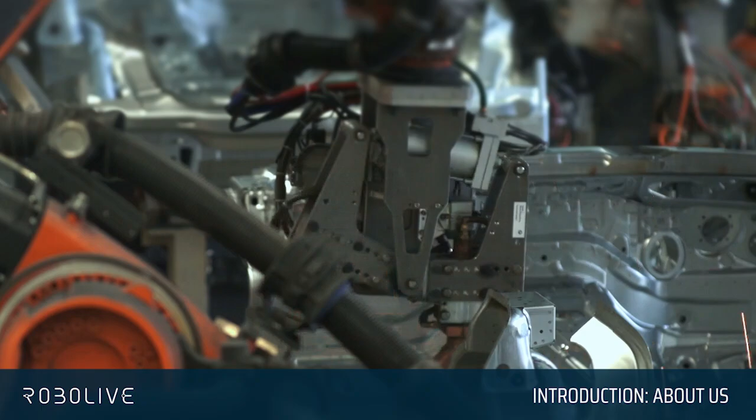Over the years, RoboLive has grown into a full-featured custom solution driving production at plants around the world. RoboLive Visual is deployed and running right now in a variety of industries, from battery manufacturing to OEM parts and beyond. The software solutions, services and features are used across the body shop by teams like quality assurance, maintenance and plant management. By watching this demonstration, you will be able to understand how RoboLive Visual operates and what benefits it brings.

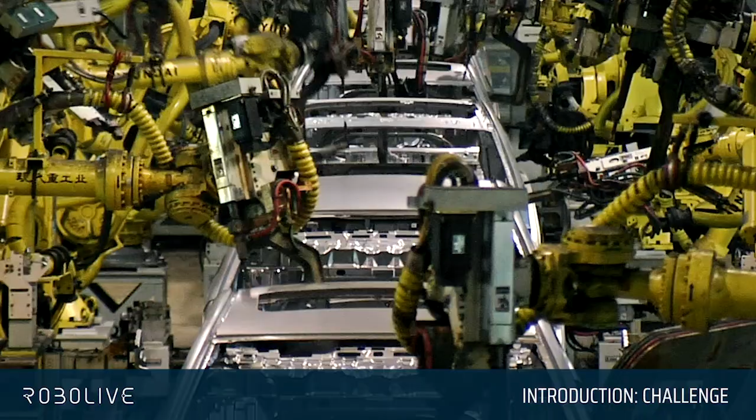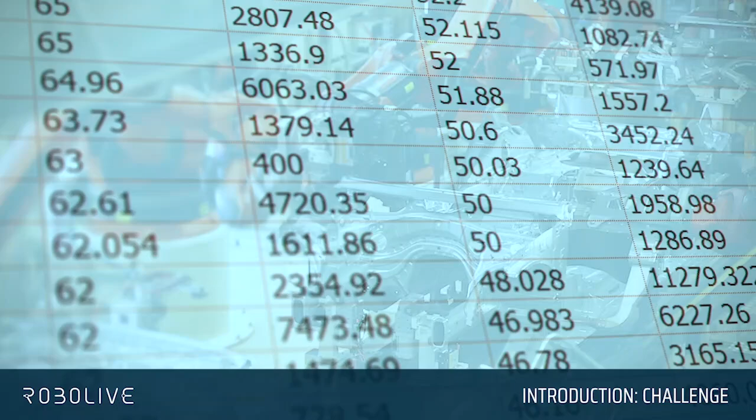Automation transformed how factories operate, and the current wave of digitalization is changing it once again. Modern plants rely on robots for a variety of manufacturing tasks. Some manufacturers have as many as thousands of robots working together in complex and delicate operations like welding and gluing. These processes both produce and utilize a lot of data: programming instructions, positions, parameters, and so on. Ensuring quality and efficiency in production relies on staff being able to access and interpret this data easily.

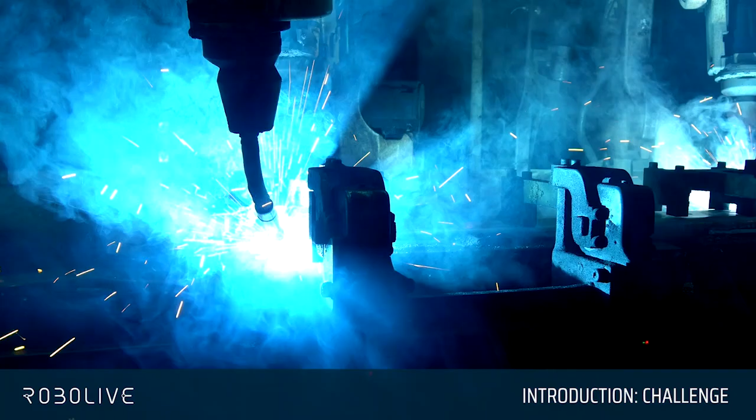This is where the problems begin. Dealing with high volumes of complex data is a big challenge, and most manufacturers don't have a way to keep data accurate and available. For example, contractors might come in on a weekend and make changes that go undocumented. You might need to look more closely into a parameter that isn't accessible without stopping production. In factories that have dozens of lines, hundreds of robots and thousands of processes, keeping track of all that information is an almost impossible task.

These issues have real consequences. Not understanding exactly how your robots are programmed can lead to production issues like missing welds, which can be costly and dangerous. And maintenance action is complicated and time-consuming when documentation is missing or out of date.

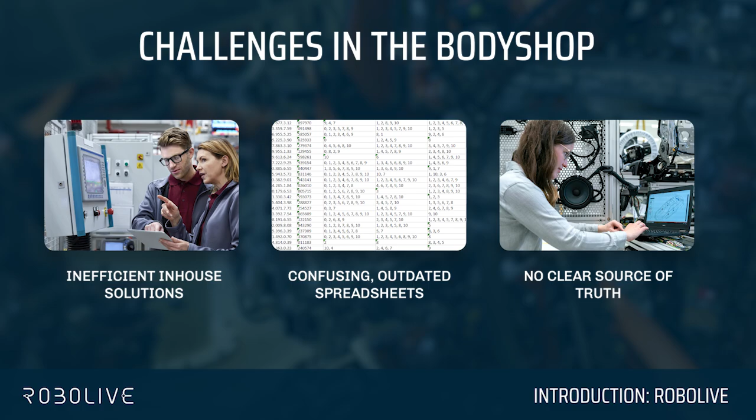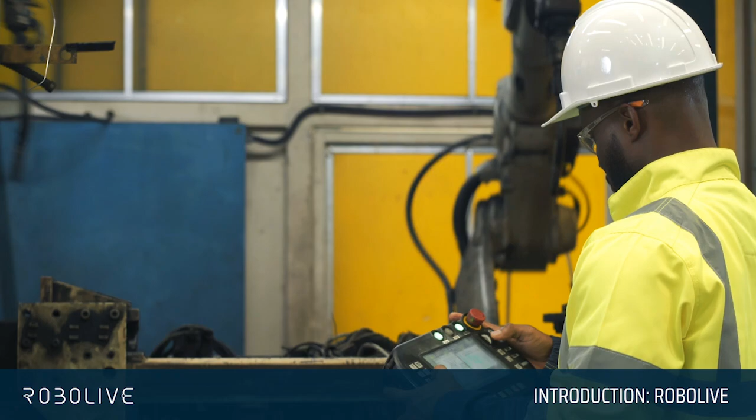Most manufacturers have come up with workarounds to the challenges posed by data management in automation, and you may be familiar with some. Our team has seen it all: complicated Excel sheets, manually updated printouts, even email chains attempting to keep everyone on the same page. These solutions all have something in common: they are time-consuming, labor-intensive, and often produce inaccurate results. None of the current solutions available are taking advantage of current advancements in manufacturing technology.

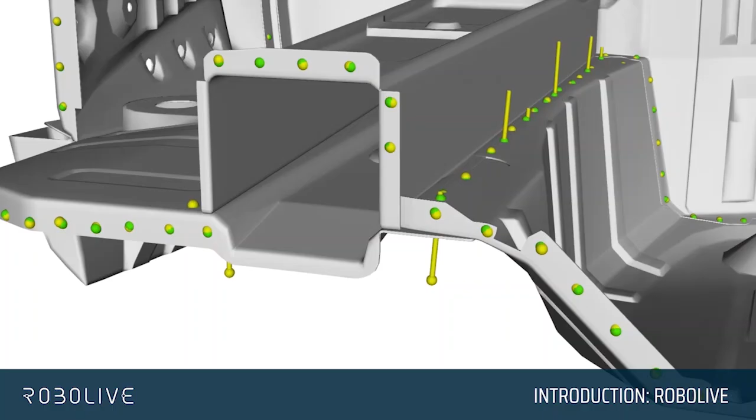That's why we made RoboLive. RoboLive Visual is a software solution that automatically collects, analyzes, and formats your robotic joining data for easy understanding. It comes in the form of an installable client, which can be used on any Windows PC and receives updates from your production robots either automatically from a local server or via regular serviced updates. Using the RoboLive Visual Client, you can view all of your process information in easy-to-use visualizations and data tables.

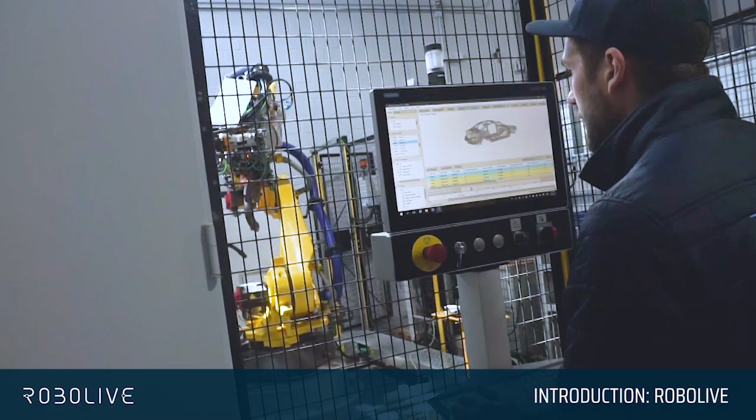Process visualization in RoboLive Visual is an intuitive and comprehensive way to view your nominal and actual process points on a CAD model of each product, while the parameter table's ability to sort and filter process data can greatly facilitate quality checks and root cause analysis. As we go through the software demonstration, you're welcome to follow along in the demo version of the RoboLive Visual Client. Reach out to a team member today for a free download.

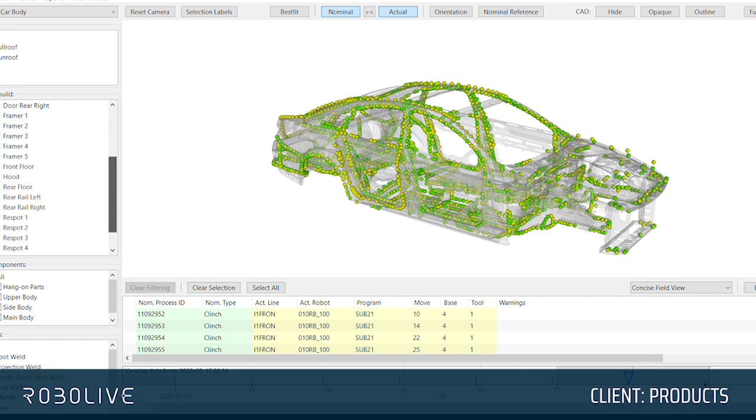RoboLive Visual is able to keep track of data for any of your product's variants and parts. When first starting the RoboLive Visual Client, all integrated products will be selectable from a drop-down menu in the top left corner. Variants are displayed below and can be toggled on or off. Each associated line and part will appear in the menus, where you can refine your display even further. There's no limit to the amount of products and variants that RoboLive Visual can process, and switching between them is as simple as a single click.

To get started viewing and interacting with data in RoboLive Visual, simply select a product from the drop-down menu. The product model will be displayed in the visualization window with its processes visible, and full information about each process point will be available in the parameter table below.

By default, RoboLive Visual's process visualization combines 3 sets of product data: the CAD model, nominal or planned process data, and the actual data. These pieces of information combine to form a complete picture of your products.

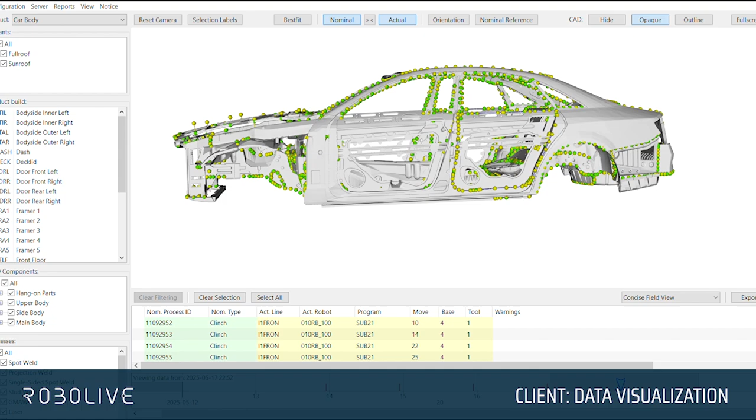CAD data is integrated during the initial setup of RoboLive Visual and shows as a 3D model of each part or product. There are a few viewing modes and features to make the models easy to interact with. You can change the colors of each part, toggle visibility, or change the display mode entirely. By selecting options in the side pane, you can view one or multiple parts together.

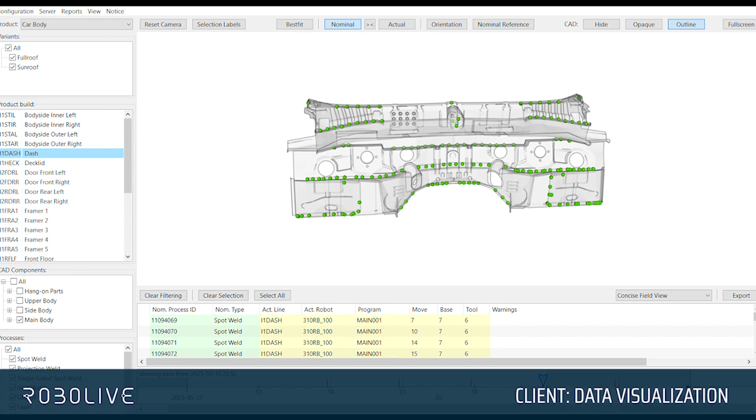The most valuable part of RoboLive Visual's process visualization is the ability to visualize each process point in 3D space directly on the part, both nominal and actual.

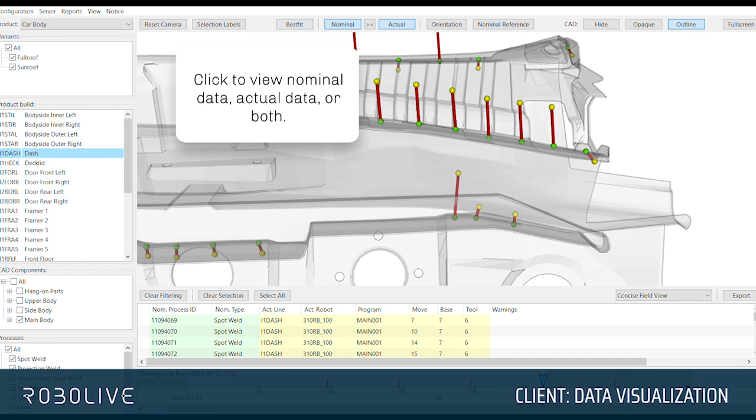During RoboLive Visual's initial setup, planned production data is integrated into the program and represented as green dots on the part. The actual data, the information about where processes are actually taking place and with what parameters, is receivable from the robots at regular intervals during production. It's represented with yellow dots, and any deviation between the two is automatically drawn in with a red line.

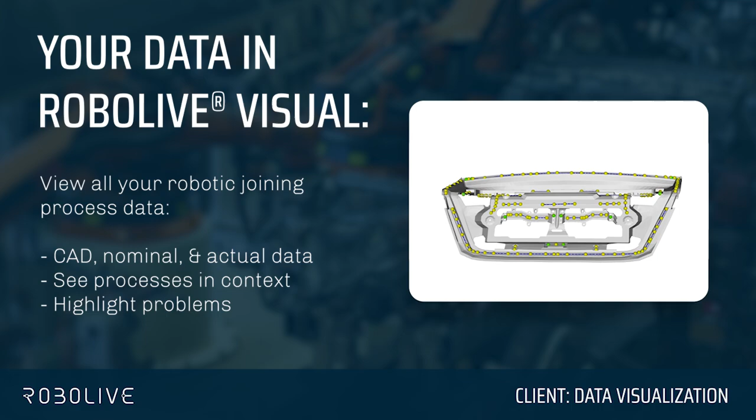This is just a simple overview of how your data is processed and displayed by RoboLive Visual. To get a deeper dive into how each process is visualized, keep watching or jump ahead to the processes section at the end of this chapter.

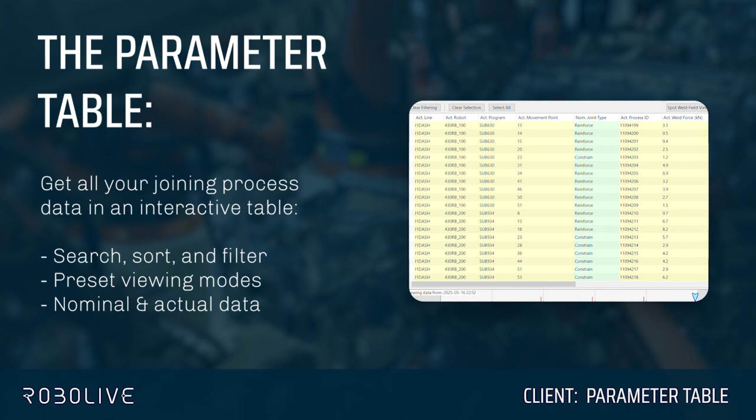3D visualization isn't the only way RoboLive Visual helps you interact with complex data. Below the visualization window, you'll find the parameter table. This table contains the related parameter data for each process in your production setup: ID, line, robot, XYZ positions, and more. This data is typically difficult to access and rarely kept up to date, so having a quick look at accurate information in both nominal and actual form is a valuable tool.

The parameter table data is searchable, filterable, and can be exported to other formats easily. The selection filtering options even let you select different quick viewing modes with data specifically relevant to welding, gluing, or other joining processes. The parameter table is a great way to keep track of process data, and you can get even more information from it with the Weld Controller interface.

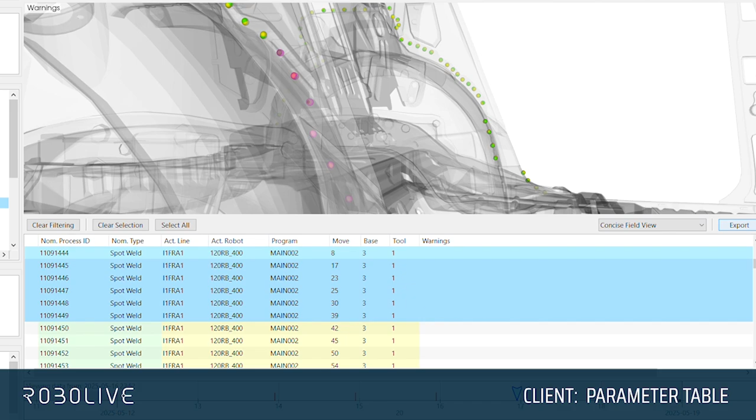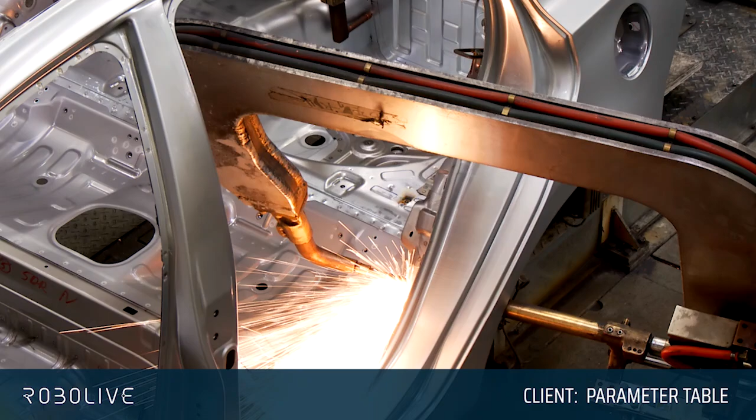This add-on allows RoboLive Visual to extract data directly from the Weld PC, and it provides an even finer level of detail about your weld processes, including timing, force, current, and more. Developed by special request for leading automotive manufacturers, the Weld Controller interface is RoboLive Visual's newest add-on, and one more example of how our software is always evolving to meet our clients' needs.

To learn more about RoboLive Visual's add-ons or custom solutions, jump ahead to Chapter 3.

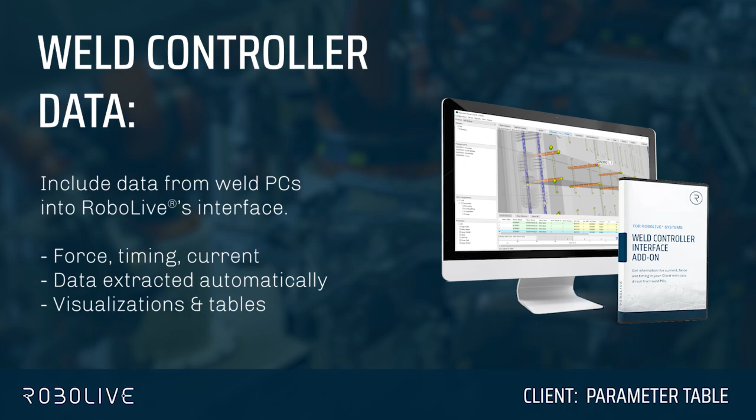The parameter table and process visualization combined give a powerful overview of the current plan status. And we can take it even further with selection labels, which are tags that show data from the parameter table in the visualization next to the process point itself.

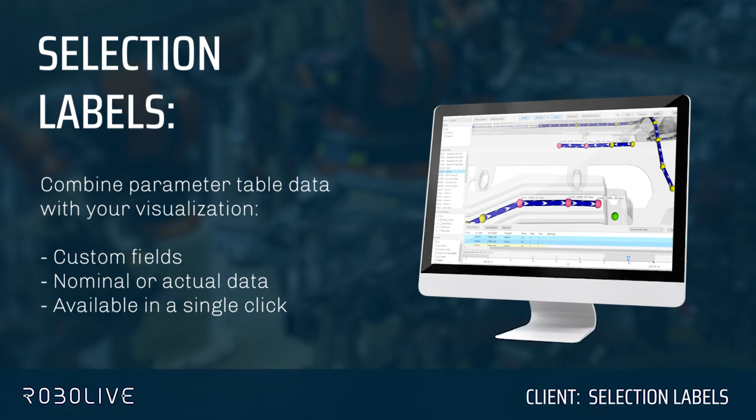After choosing what data you'd like to display, selection labels will be instantly visible simply by clicking on an actual or nominal data point. By default, the selection labels display associated robot and any warnings, but can be customized to display any parameter from the table.

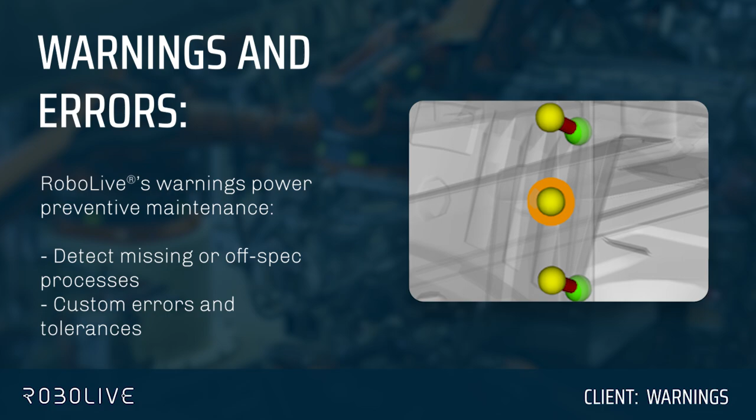Warnings are another important part of RoboLive Visual and can be a powerful tool for addressing and preventing quality issues. RoboLive Visual analyzes both planned and actual data, so the program can automatically tell when a process isn't occurring where it should or is out of spec in some other way. These detections generate error warnings in the RoboLive Visual Client.

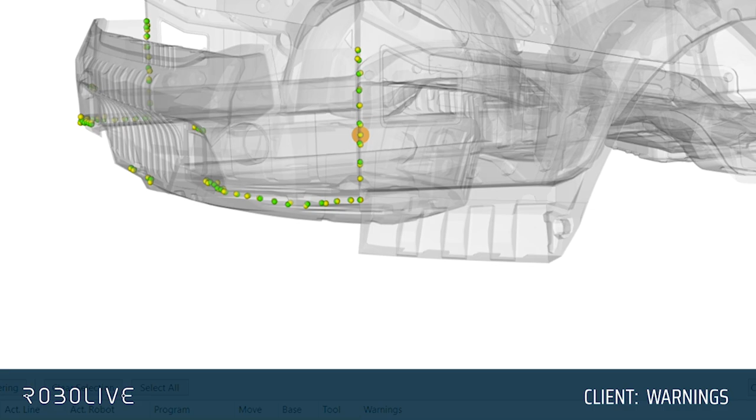One of the most important errors automatically detected by RoboLive Visual is off-location processing. This error displays when the actual location of a process is significantly distant from the planned location and could result in a problem like off-location welds.

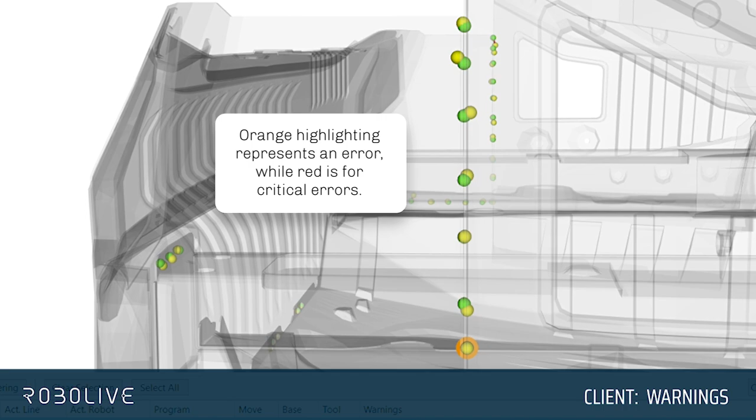Swapped IDs are another common error detected in RoboLive Visual. Here, the collection and analysis of past robotic data has shown that these two processes have abnormal IDs. Using the timeline, we can see clearly when the change occurred, where it's happening, and how to fix it.

As with all of RoboLive Visual's features, error warnings are completely customizable. Tolerances can be adjusted to meet your organization's own quality standards, and custom error conditions can be included with your installation by request.

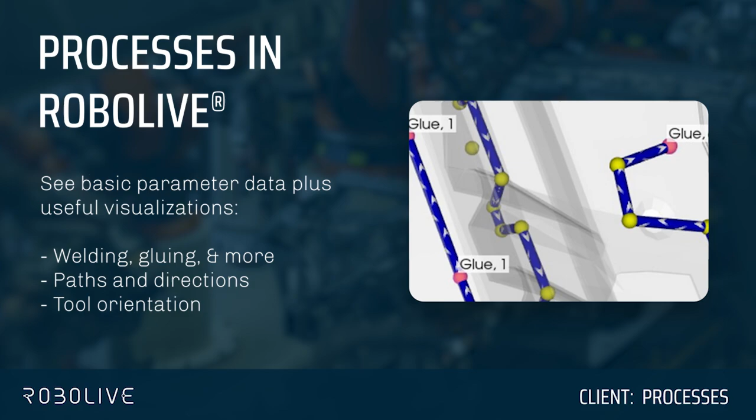RoboLive Visual is designed to work with any kind of process you might use and is constantly being updated to best meet the changing needs of manufacturers. In order to help you make the most of the program, different processes are visualized in different ways to highlight the most important information. Processes along a path, like glue, are visualized accurately with direction indicated.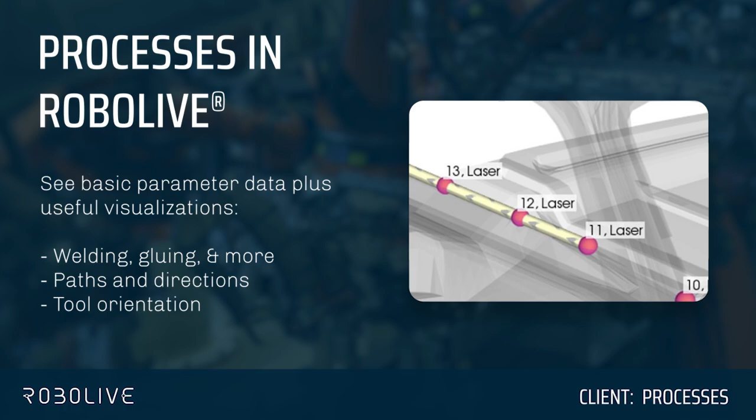Tool orientation can be toggled for processes like stud welding where it's relevant. By selecting from the options in the bottom left corner of the RoboLive Visual Client, you can see all processes covered by your installation and filter through them. And of course, the parameter window can be filtered to show data relevant for each specific type of process.

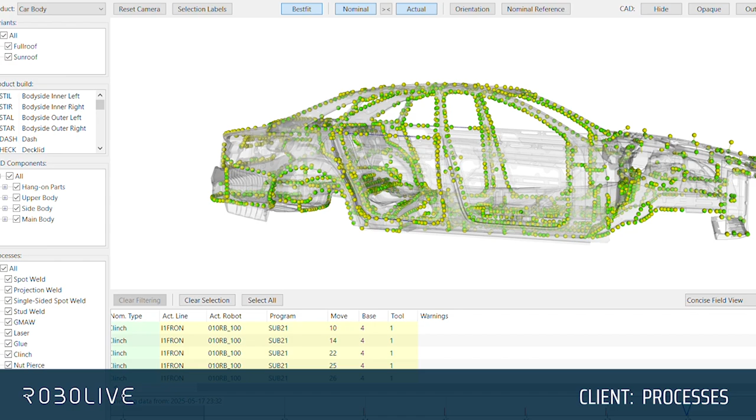For most manufacturers, spot welds will be the most common process displayed in RoboLive Visual. Spot welds are shown as a simple pair of dots, green for planned data, yellow for actual data, with a red line showing any deviation between the 2 points. By toggling tool orientation on, we can see the associated direction of the tool.

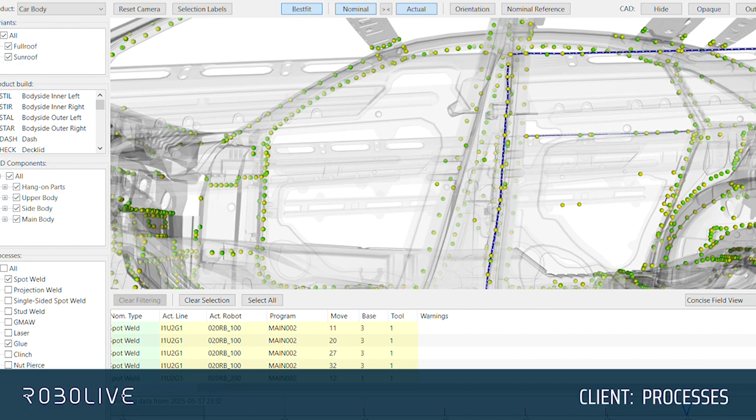As we showed, processes along a path, like gluing or laser, are displayed with the path and direction shown. This is very helpful for getting a big picture understanding of how and where these processes are happening. And while RoboLive Visual is most commonly used by automotive manufacturers and their suppliers, special features are available for battery manufacturing processes such as gap fill visualization.

We at Dressler Automation want to make it as easy as possible for you to benefit from RoboLive. That's why all RoboLive Visual installations come with an infinite number of client licenses. For no additional fees, any staff plant-wide can access RoboLive Visual and benefit from its insights.

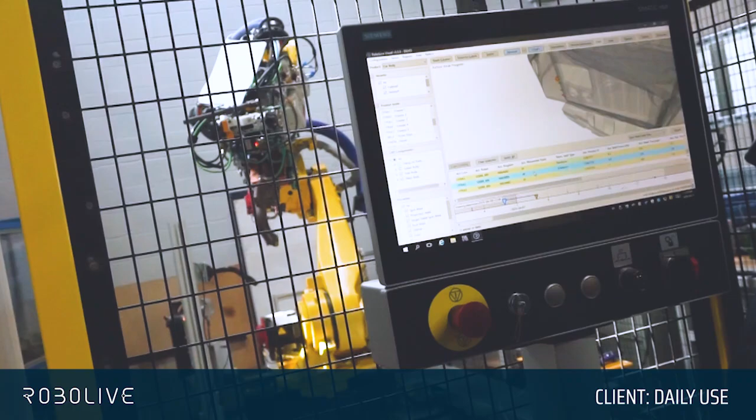The RoboLive Visual Client runs on any Windows PC. Manufacturers often choose to have it installed on the personal computer of any relevant staff such as managers, weld engineers, maintenance professionals, and online PCs for direct access. RoboLive Visual can be used as a tool for daily monitoring, preventive maintenance, or as a diagnostic tool for resolving errors.

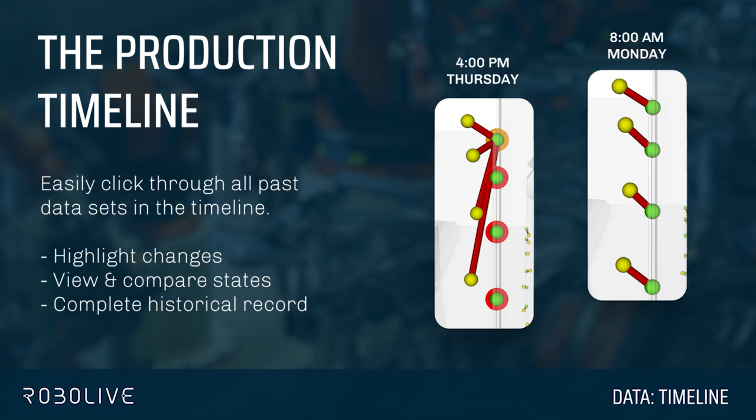Directly below the visualization window, you'll find the timeline, which is an archive of all production datasets that RoboLive Visual has collected. Data can be collected as often as every shift with an on-site server plan, or on your own schedule with a service plan. To learn more about RoboLive Visual's installation plans and update methods, jump ahead to Chapter 3.

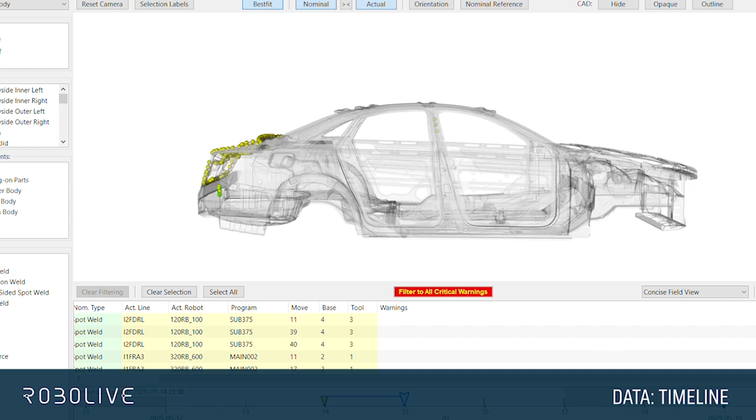By clicking back through the timeline, you can easily view and compare past plant states and see any changes to the actual data. Comparison is made even easier by filtering: just click to select 2 different data sets on the timeline, and the visualization automatically updates to show only processes which have changed between the 2 points.

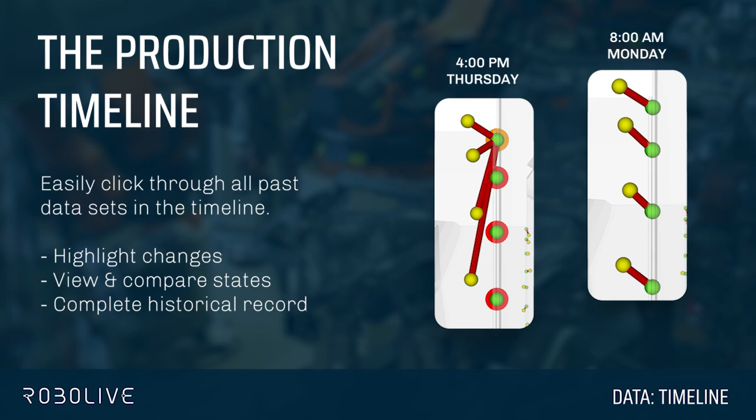The timeline is a very valuable tool for manufacturers and offers a completely new way to detect changes that otherwise would go unnoticed. For example, you might come into work on Monday and use RoboLive Visual to instantly see what changes were made in the plant over the weekend.

When navigating through the RoboLive Visual demonstration data, or even your own production data, you may notice process points with an actual location that is extremely far from the planned location, with long red lines connecting the two. While normally red lines indicate deviations, that's not what this means in this specific case.

Large apparent deviations like this actually represent an issue with base frames, where a robot has been programmed with an incorrectly defined origin point. Bad base frames on their own don't always result in production issues, which is why these lines aren't accompanied by a default warning.

They can cause trouble later on down the line though, for example when making adjustments to the process, and the deviation makes it difficult to understand the visualization. Finding or correcting origin points is typically an expensive process, as it's usually just an abstract reference point in open space.

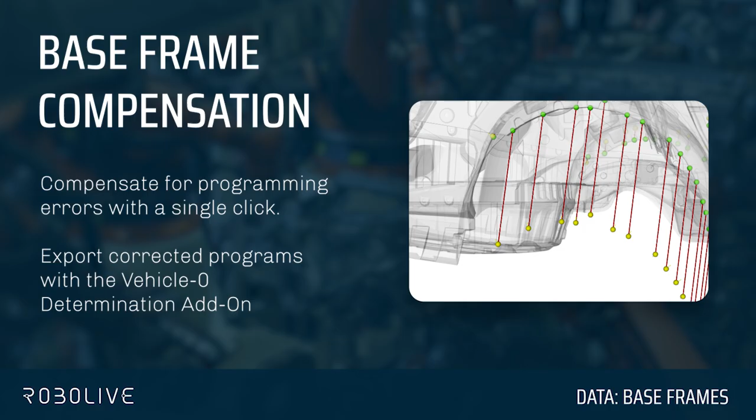But compensating for or even correcting bad base frames with RoboLive Visual is easy and doesn't require any special effort or equipment. Just select the processes you'd like to correct and click the Best Fit button, and our proprietary algorithm will use your production data to automatically calculate the origin point, and then adjust the visualization accordingly. The corrected data can even be exported for amending the robot's programming itself with the Vehicle Zero Determination add-on.

The main windows of the RoboLive Visual Client contain a host of useful information, and you can get even more insights by using the automatically compiled reports. One of these reports is called the Coordinate Change Report.

Because RoboLive Visual keeps a complete history of all robotic joining process data in your factory, it can be used to analyze trends over time. The Coordinate Change Report uses past data sets to determine which processes have been changed the most. This is useful information because frequently changed programs can indicate deeper underlying problems like degrading machinery.

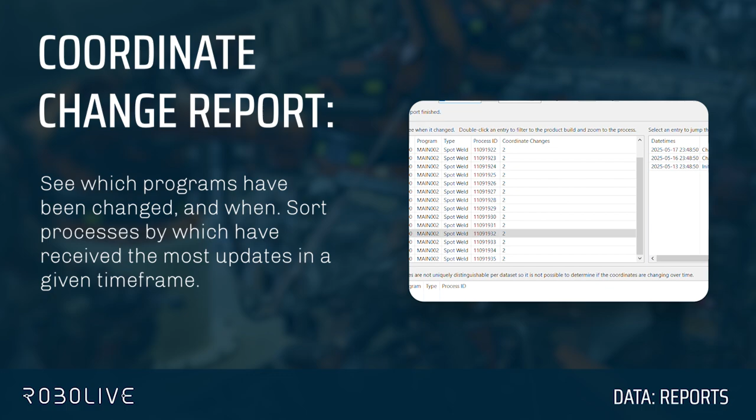Without a tool like RoboLive Visual, there is no way to access this information. With RoboLive Visual, it's simple: just navigate to the Reports menu, select the Coordinate Change Report, input dates, and you'll receive an instant analysis of which processes are receiving the most frequent updates, including a record of when each change was detected.

The Process Warning Report is another useful report automatically compiled by RoboLive Visual. By navigating to the Reports menu and selecting Process Warning Report, you'll be able to view an interactive chart and data table with a complete breakdown of the errors RoboLive Visual has detected in your plant. This includes a graph organized by error type, so you can see any trends.

If you have information or estimates about the cost associated with errors in your plant, such as the average cost of scrap or downtime, you can fill that in below and get an estimate of what the financial impact of each error type has been.

RoboLive Visual is as easy to install as it is to use. The solution is designed to be flexible, with purchase and expansion options that suit your needs no matter your organization's size or budget.

RoboLive Visual Setup is the initial integration, and it's a great place to get started with RoboLive Visual. With the purchase of RoboLive Visual Setup, you'll get a static client prepared with your desired products and data, which includes unlimited installations for your entire team.

RoboLive Visual Setup includes the complete RoboLive Visual Client with full access to process visualization, the parameter table, and any number of variants per product.

RoboLive Visual Setup is a great choice for testing the system, as it's available with a minimal one-time investment and no need for interaction with IT infrastructure. And if you'd like to include an update service later on, you can do so at any time.

To start receiving actual data updates, you'll need to select either RoboLive Visual Server or Service. RoboLive Visual Server is installed as a virtual machine on the production server, where it provides regular updates of robot data and distributes it to all your connected clients.

This is the best practice for installing the software solution, as it allows for hands-free, automatic updates from your robots as often as every shift.

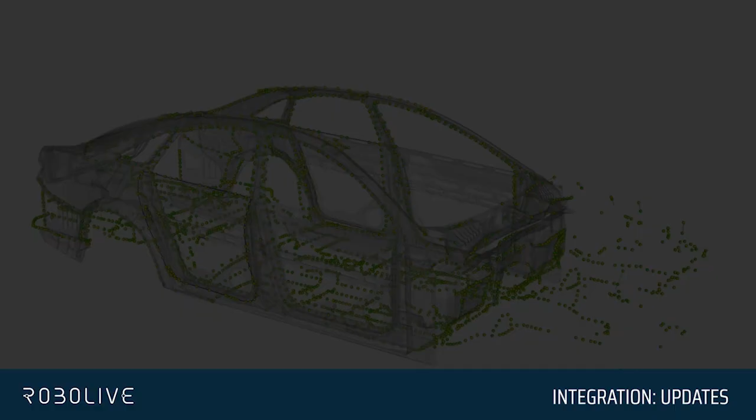Remember, no matter how you choose to install RoboLive Visual, you'll still receive the same benefits. RoboLive is a completely customizable solution with a flexible and experienced team behind it. No matter what requirements you have, we can create solutions to suit your needs.

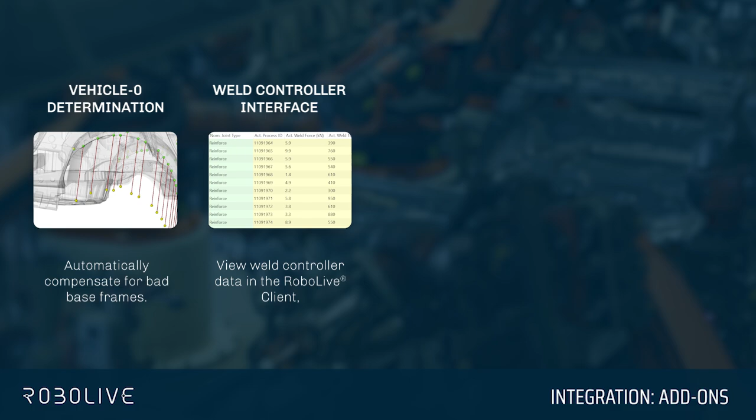Add-ons in RoboLive Visual are optional modules that add new capabilities to the software solution. You've already heard a bit about our Vehicle Zero Determination and Weld Controller Interface add-ons, but there are many other useful add-ons available for the RoboLive Visual Client.

The Robot Documentation add-on, for example, lets you create custom formatted documentation in a single click. Software Overview provides a more detailed overview of robot software information.

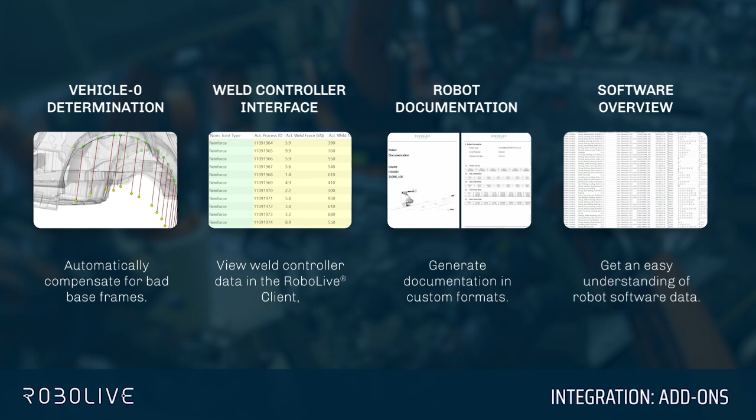In addition to the optional add-ons that expand the software's functionality, compatibility upgrades are available to facilitate installations in uniquely challenging situations. New add-ons for RoboLive Visual are frequently introduced to meet our customers' needs. And if you need features beyond our current selection of add-ons, custom development is available.

The benefits that RoboLive Visual brings to your daily work are measurable. One effect that you're likely to see right away after starting with RoboLive Visual is a decrease in processing-related downtime.

Downtime is sometimes a necessary evil when making corrections or fixing issues, but it can be dragged out needlessly by problems like missing documentation and communications breakdowns.

By consolidating all process data into a single source of truth that any plant staff can access, RoboLive Visual greatly facilitates maintenance action and helps lines get moving that much faster.

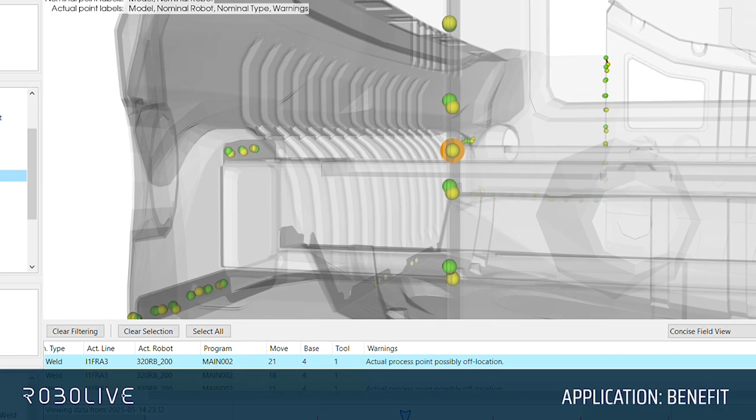Information in RoboLive Visual is extremely easy to search, filter and export, so we can say goodbye to hours spent dealing with outdated spreadsheets. And with RoboLive Visual's early warning system driving preventive maintenance, you'll see a noticeable reduction in bad parts, rework and scrap.

The benefits add up. We estimate that in typical circumstances, using RoboLive Visual plant-wide could result in an increased OEE of up to 3%.

Every manufacturer knows that time is money, and RoboLive Visual saves you both. By preventing downtime and scrap and reducing the risk of recall, as explained in the previous section, RoboLive Visual provides an enormous value to customers on a very minimal investment.

In fact, customer data shows that you're likely to recoup your investment on a whole product installation of RoboLive Visual in under 2 years. Tools are available to help you make a more accurate estimate of how you benefit financially from RoboLive Visual. To receive additional documentation or interactive spreadsheets, reach out to a team member today.

For a first look at the RoboLive Visual Client, reach out to our team for a first consultation. Our engineers will present the RoboLive Visual Client to you live, answer questions, and provide a tailored roadmap for how to best suit your specific needs.

Some manufacturers may be eligible for a low-cost feasibility test, where you provide a sample of robot data and we demonstrate it integrated into the client.

When you're ready to move ahead, you can decide which models or products you'd like for your first RoboLive Visual setup integration. After choosing an upload method and duration, you just need to wait a few short weeks for everything to be prepared. Once you receive your custom download link, you'll be ready to download the RoboLive Visual Client and start digging into your robotic joining process data.